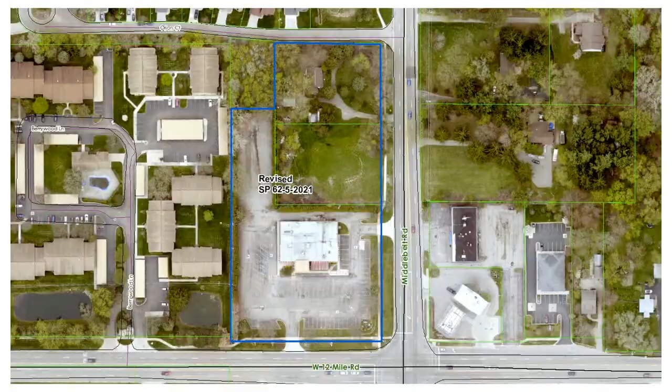There's a reason that comment is in there, which I'll get to in a second. They have also provided a 10-foot setback for the parking, but that is also measured from the existing right-of-way rather than the planned right-of-way as required. So there would be a 9.5 feet variance for that setback as well.

Another note in this table is that information has not been provided on rooftop equipment. They have a pitched roof, and I think it's likely that they're planning to screen anything that might go on the rooftop with the actual pitched roof, put inside where you've got your courtyard, but we'll let them speak to that. The dumpster enclosure that they're showing meets our standards. They've not addressed mechanical equipment on the plan, but we do have some screening requirements for that section reference.

When we look at fences, they are showing a couple of existing fences.

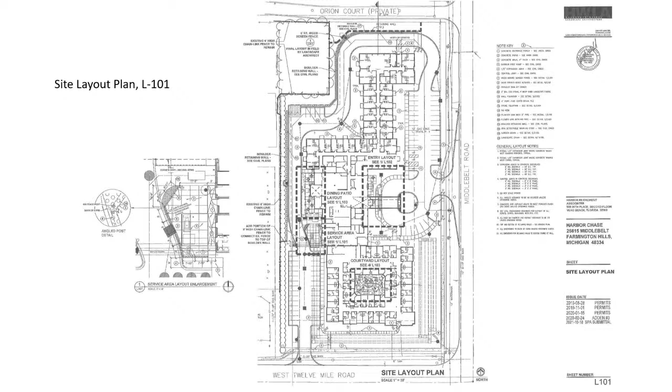We have some specific standards for assisted living facilities in section 417. They are meeting that standard. And then in 3.7, we have some additional standards that apply to the RC2 district. Those standards also have been met. Some of it will be subject to engineering review.

Corner clearance is compliant. We generally like to see that indicated on the plan, however.

When we look at landscape development for the overall site, they do have a full evergreen screening proposed along the entire property line facing residential zoning. There's Norway spruce along Orion, and then arborvitae along that undeveloped RA1 lot.

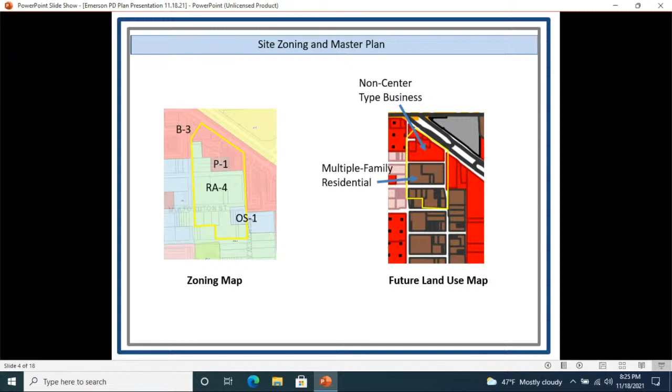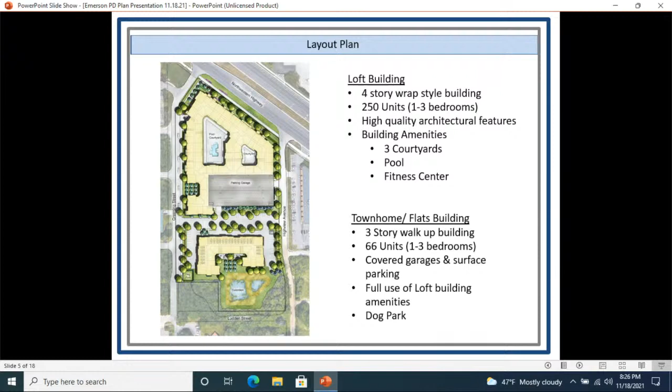Just to touch on parking a little bit, we know that we're under what the required parking is. There are 600 and some odd spaces required; we're at 533, allocated the way you see on the screen here. 416 spaces in the 4-story parking structure take up the majority of our spaces. The southern building has 23 garage spaces, which are covered garages, plus 23 more spaces. The surface parking between the 2 buildings accommodates 71 spaces, and we're proposing parallel parking along Greening Street that will accommodate an additional 23 spaces.

I just wanted to touch on this: out of 316 units we're proposing, 155 of them, almost half, are 1-bedroom units. If we met the ordinance, the code requirement is 2 spaces per unit. Maybe a few of these 1-bedroom units will be occupied by married or engaged couples, but a large majority are going to be 1 tenant, 1 car, maybe not even a car. A lot of the demographic we're going after will use rideshare programs, bikes, and work remotely. I couldn't imagine living without a car, but a lot of these people don't want the debt, they don't want a car. So we feel that where we are with parking is ample for the product we're providing.

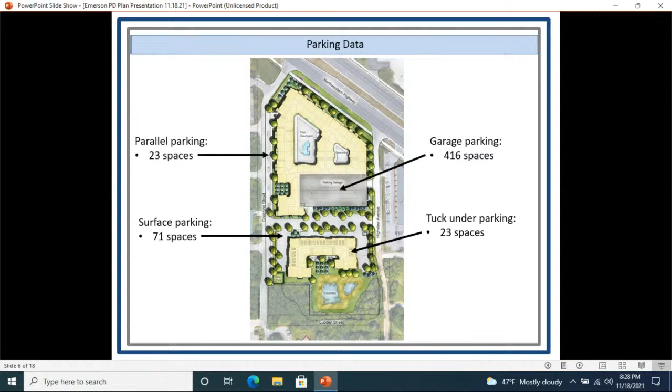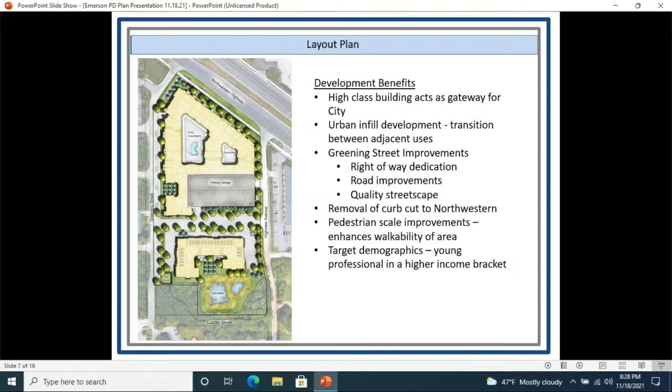So, development benefits: it's a high-class building. We'll get into some of the quality of construction and the architecture. It's high-class from a residential perspective, an apartment building, but not your standard apartment building. These aren't garden-style apartments, these are high-end lofts that will be high quality and very impressive, and everyone is going to be very happy with the end result.

It's an urban infill development. It offers a logical transition and provides a core residential district with density that can benefit all of the adjacent commercial applications around here. 316 units is a good amount of people coming right into this area. There are some local businesses that are suffering, and the quality of people coming in here are going to enhance and utilize that. Density.

It was kind of the core tone of the letter. I understand everybody, we all know that we're asking for an aggressive density on this site, significantly higher than what the ordinance allows. However, we are very comfortable with the density we're providing, and candidly, the density is required.

We are targeting high-end young professionals, millennials. It's a demographic that really isn't targeted here. These individuals aren't going to rent your standard garden style apartments. So what we propose is an amenity package, a lifestyle for them. It's a hell of a lot more than just granite countertops in their kitchens. It's high-end efficiency amenities, all the amenity packages I referenced. It's a walkable community, so they can walk out the door and within 5 minutes get their $17 cup of coffee at Starbucks.

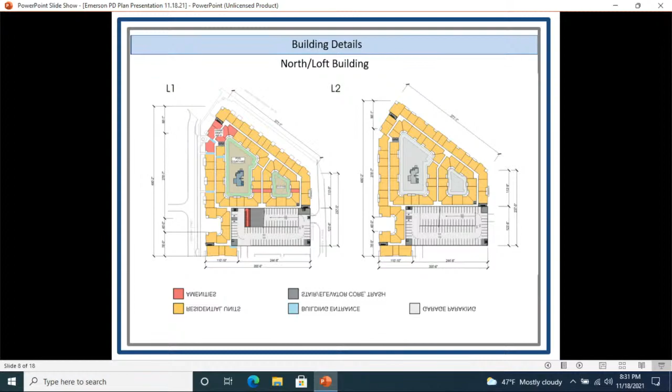Mr. Chairman, Commissioner Schwartz. Typically, when we get these, all we can do tonight is set for public hearing. So typically we take a couple minutes and give a little feedback. If there are things commissioners want the applicant to address, then I don't know why we're sitting here listening to a whole presentation. We can't do anything tonight except set for public hearing. They're going to have to do all this next month.

So if commissioners have feedback, things, information to bring back, or proposed changes for them to evaluate, we should be doing that. I don't see why we're sitting here doing all this, because everything he said, he's going to have to say next month. And whatever the architect's going to say, whatever the applicant's going to say, we're going to have to hear next month. So, what's the feeling among the commission? Do you want to continue?

I'm here. Because if I remember, we talked about wanting to continue 5 minutes ago, I guess. What did I ask? Next week, right, next month?

Certainly, prior to setting a public hearing, I'd like an overview, not only from the applicant but also from the city, on the issues of bed counts and room sizes, whatever. I think that's kind of deep in the weeds for prior to a public hearing. I'd like a higher level perspective presentation on what we're going to see, more brief, and then as a courtesy to the proponents, since they're here with their people tonight, I think we should hear them out, but let them know all this detail we're going to hear at the public hearing.